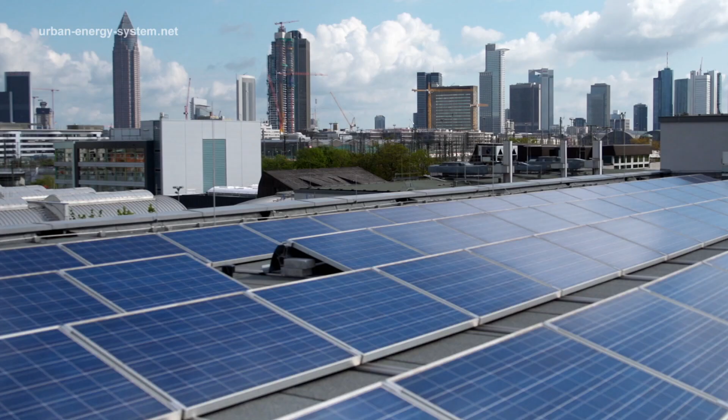In Kassel, Germany, scientists of the Fraunhofer IEE are looking for answers to these questions. Their focal point is the urban energy system, a new research branch of the institute. This new research focus unites all designated tasks aimed at establishing a sustainable energy supply for the future.

It starts with developing sustainable concepts and providing the necessary planning tools and software. For example, coupling components, such as heat pumps and electric charging stations. The final aspect is the management of energy and the resulting business models. The successful execution of such tasks is critical to allow a shift to renewable energy in urban regions.

The Fraunhofer scientists are looking for partners to work with them at their new research center, the Urban Energy System in Kassel. Such partners could range from housing associations and transport companies to energy and technology suppliers.

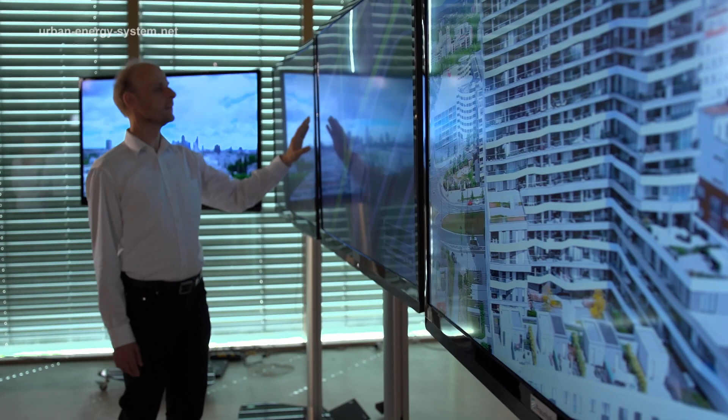The problem is that the energy supply for heat, transportation, and electricity have always been dealt with independently from one another. Fraunhofer researchers are therefore pursuing the goal of interlinking these energy sectors to establish a more efficient form of energy supply.

In an apartment complex in Frankfurt, this concept has already been put into practice. There are more than 150 residential units here, encompassing an area of about 20,000 square meters. The unit was designed to consume as little energy as possible in order to reduce the overall heat demand of the building.

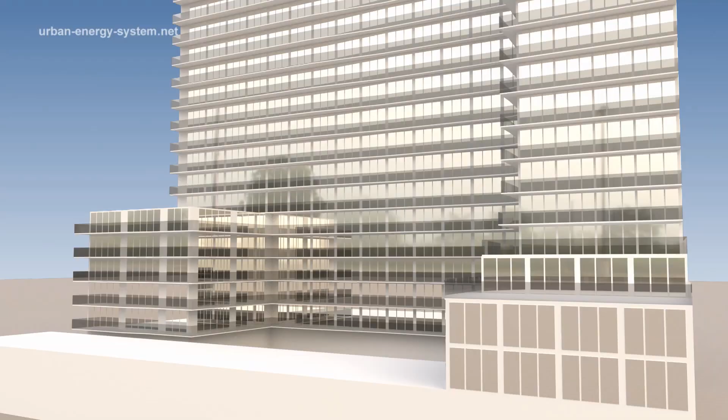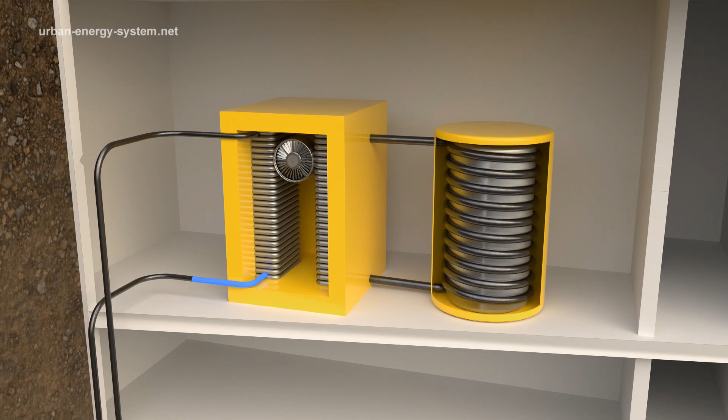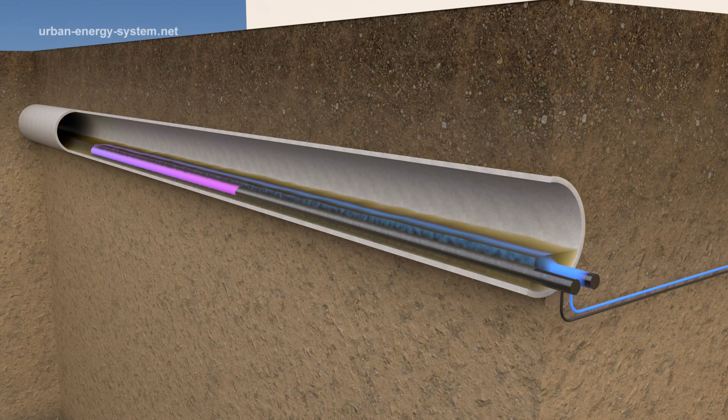In addition to this low-energy type of construction, other measures ensure the building's energy efficiency. The basement stores one of Europe's largest heat pumps. The pump utilizes waste heat emitted by the nearby wastewater system. Even in winter, the temperature here measures at least 12 degrees Celsius.

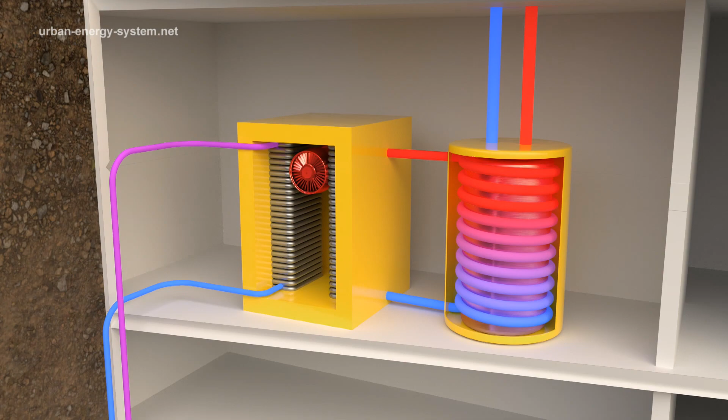This temperature level can rise to up to 40 degrees Celsius as it is densified by the pump using electric energy. In doing so, the pump has an electrical input of only 60 kilowatts. This generates a heating energy of 360 kilowatts, enough to supply the entire apartment complex with heat. The usage of electric energy throughout this process is highly efficient.

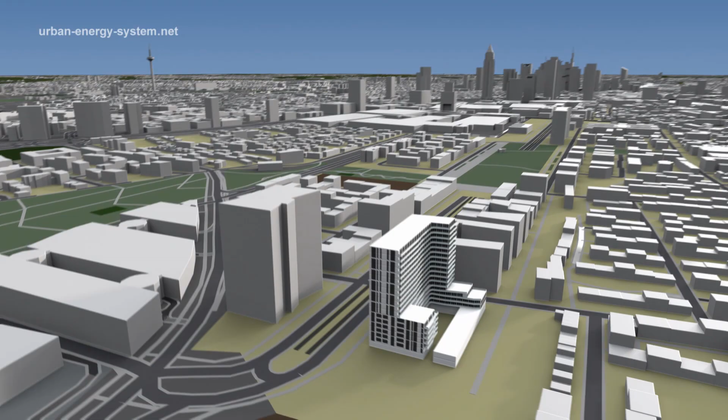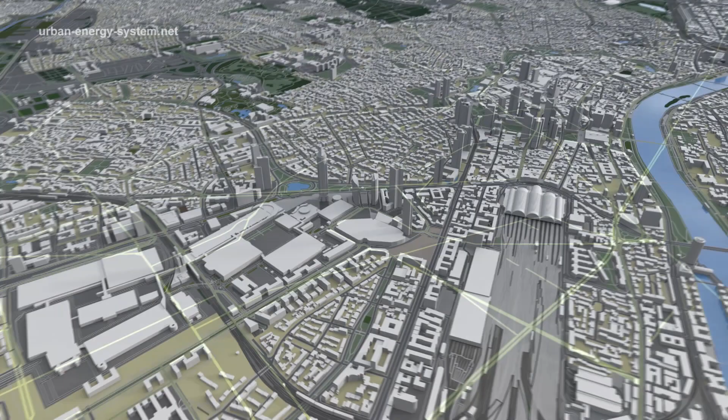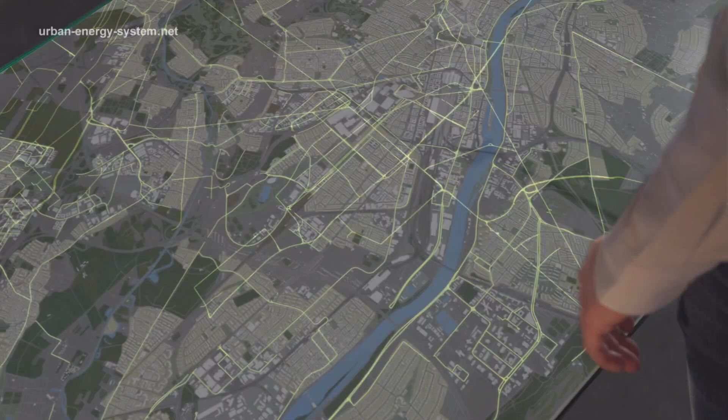This can be applied to other parts of the city. Frankfurt am Main has an extensive sewage canal network of around 1,600 kilometers in length. This provides great potential for heat energy right in the center of the city. The Fraunhofer scientists analyzed the amounts of waste heat and recorded them on a geographic information system-based platform.

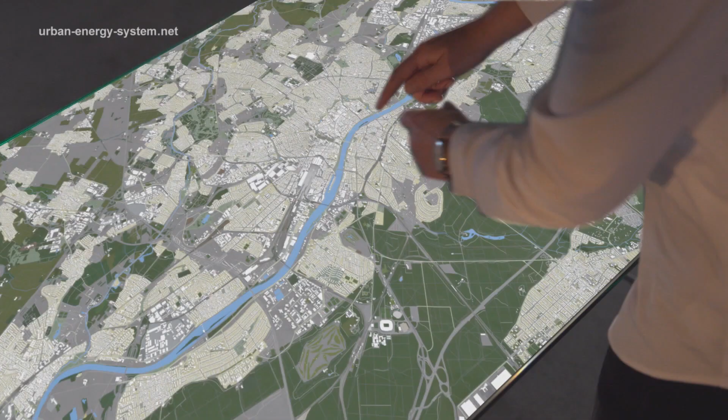Aided by digital planning tools, project partners are able to quickly identify such energy potential and can now incorporate it into their planning. If the heat pumps run exclusively on clean energy, the heat supply for buildings is thus CO2 neutral.

To ensure that cities attain climate neutrality, it is crucial to identify waste heat potential as an energy source and combine it with renewable energy sources to allow for an optimization of integrated energy. The goal is to manage energy in such a way as to guarantee the efficient utilization of renewable energy.

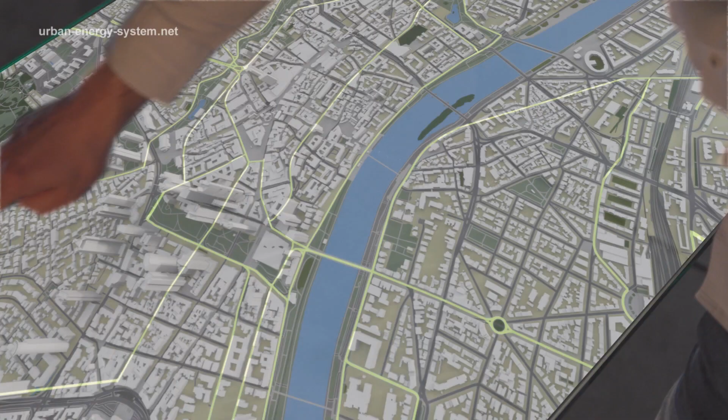If heat pumps were to make use of the entire potential the German canalization network has to offer, this one measure could reduce CO2 emissions by 1% in Germany. And canalization is not the only waste heat potential cities have to offer.

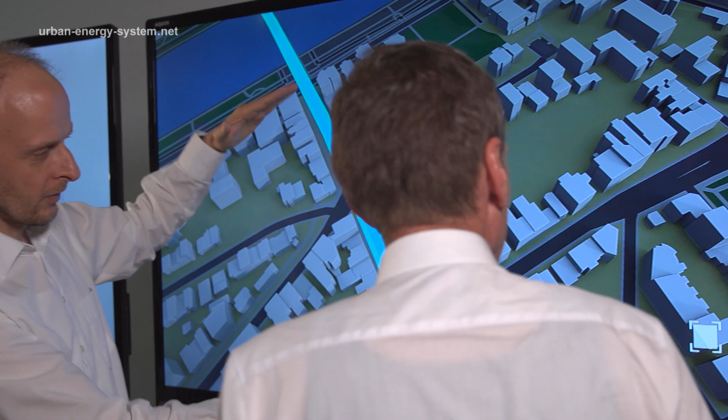Temperatures in subway shafts rarely sink below 12 degrees Celsius. The Fraunhofer scientists, using digital planning tools, analyze this potential source of heat energy as well. There are several hundred megawatt hours that could be utilized each year.

The Main River is also full of potential. The river has an average annual temperature of nearly 14 degrees Celsius and flows past Frankfurt with a water mass of around 150 cubic meters per second. This would provide environmental heat of a few hundred megawatts.

The Fraunhofer scientists are not looking solely at bigger cities for heat waste potential. In Germany, around 80% of buildings are more than 25 years old. In many cases, construction doesn't meet modern energy efficiency standards. It can be difficult to find investors for houses in need of renovation that are located outside of popular in-demand cities.

Within the framework of the urban energy system, Fraunhofer scientists are developing specific tools to facilitate taking on-site inventory of buildings. Potential investors can now use an app to receive a quick overview.

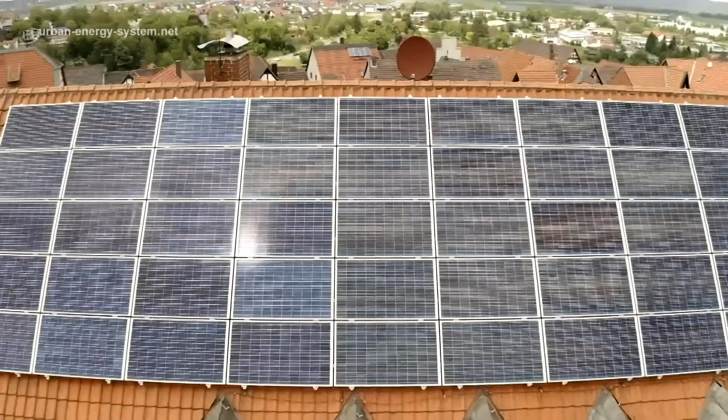Another important challenge of urban planning in the coming years will be electromobility. There are specific questions that are essential for an ideal management of energy. How do I rely on mainly renewable energy sources for electric vehicles? And where do I fit electric charging stations into urban spaces? Moreover, alongside new energy consumers, additional new energy producers must be connected to the grid.

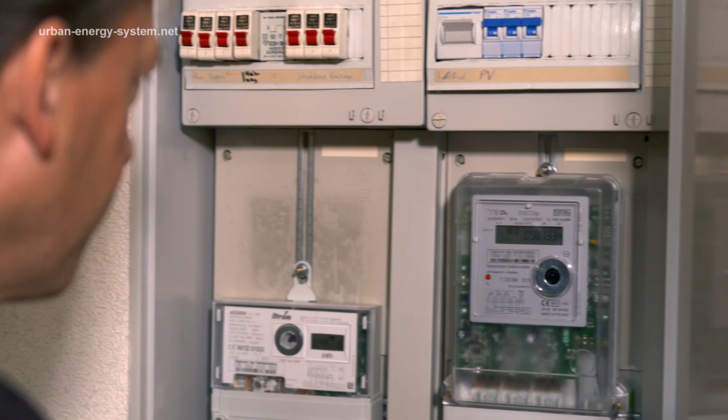The installation of an intelligent measuring system offers energy suppliers the opportunity to establish themselves and their products on the market. The introduction of variable electricity tariffs creates new business models. This is a challenge electricity providers must face.

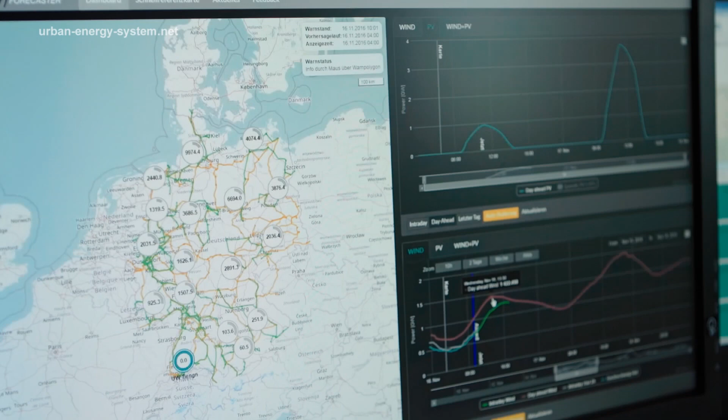In order to support these suppliers, the Fraunhofer scientists are testing their new business models in their own control room under realistic conditions. This tells energy providers if their schemes have a chance of success in the face of an increasingly volatile energy supply in the market.

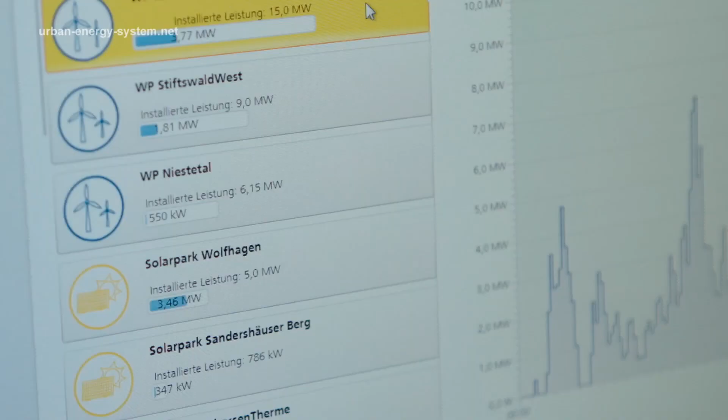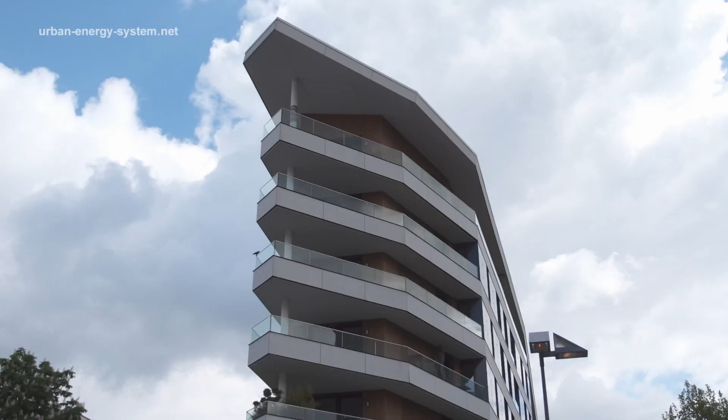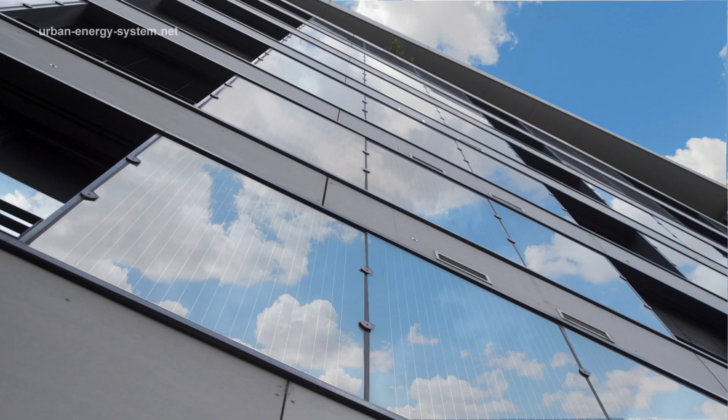Regardless of new marketing opportunities for energy services, innovative energy management, or energy efficiency and integration, in this active townhouse in Frankfurt, many of these concepts have already been implemented. This building generates more energy than its inhabitants consume. It was constructed by one of the largest housing associations in Germany, the ABG in Frankfurt.

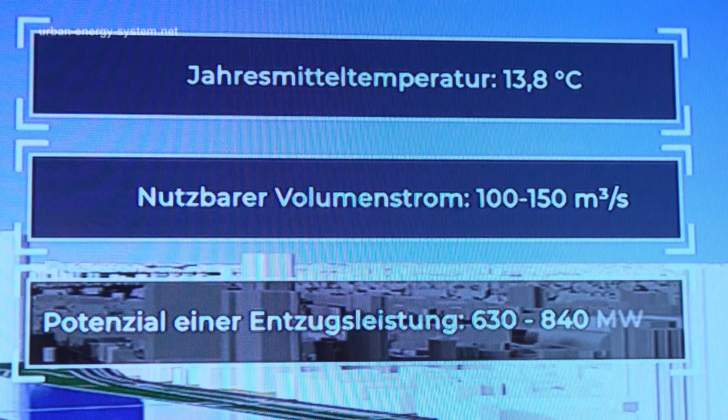If we are to conduct research and development here, we need a reliable, strong partner like Fraunhofer. And our cooperation has been solid for years. This cooperation will be nurtured in the years to come. In the course of their work, the Fraunhofer scientists in Kassel have developed extensive concepts that perfectly target the needs of a specific region. They create their own laboratory infrastructure and at the same time connect and cooperate with international and local partners.

Companies are invited to participate in the urban energy system, housing associations or component manufacturers or energy suppliers, to transform the urban energy revolution. The urban energy system of the Fraunhofer IEE is making a significant contribution to bringing the energy revolution to the city. This way, the urban space, no matter the size of the city, can develop sustainably. And this is an existential contribution to climate protection.